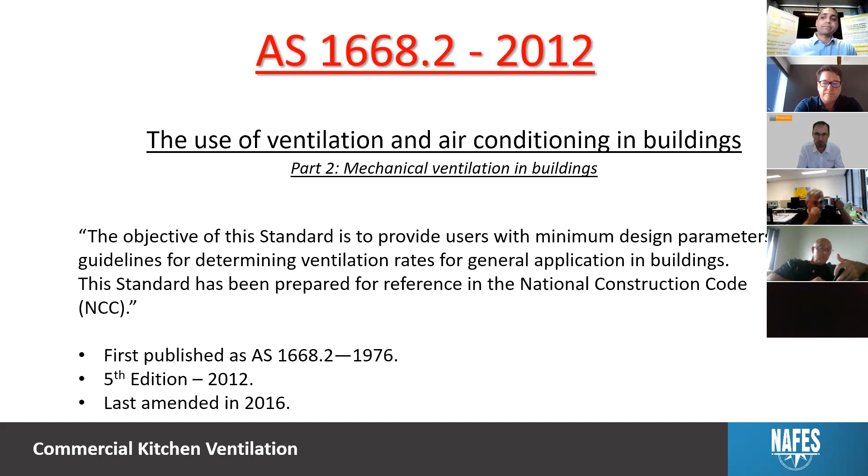Okay. Just a quick summary of today's topics. The standard, as I said, is quite vast, and even the kitchen ventilation segment is quite vast as well. So we've picked a couple of key topics that, by popular demand, we thought would be quite useful to everyone. The first topic is minimum equipment overhangs for typical appliances. We'll discuss that with the different types of appliances and the overhangs from the sides and the front. We're also going to talk about kitchen exhaust hood filters. We'll identify some common filter types and then the distances required from specific appliances.

Another topic is kitchen renovations and the rules around renovating your kitchen with regards to the ventilation system. Another popular one was solid fuel appliances. As we know, they're all the rage these days. There's a solid fuel kitchen appliance going into almost every kitchen. So we'll discuss what the Australian standard states about that. To keep things brief, we will be focusing on what the standard says as opposed to anything external, but I will mention certain possibilities around that to help get a project on the go.

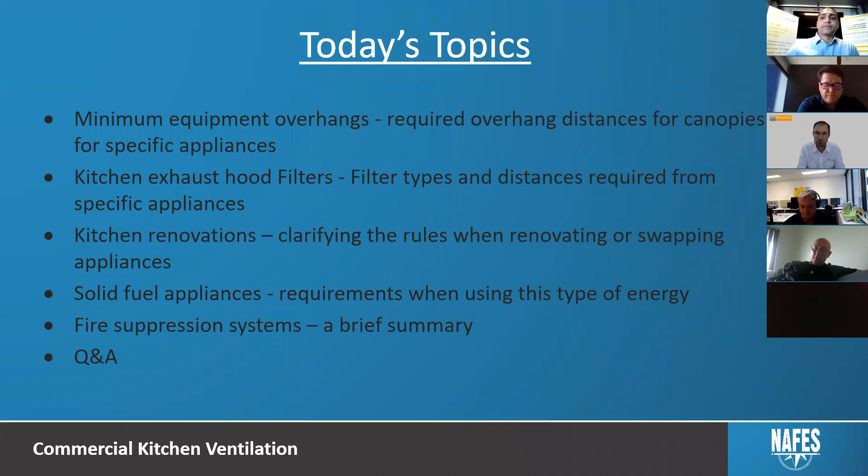Okay. So the first topic, minimum overhangs. So I hope you can all see this.

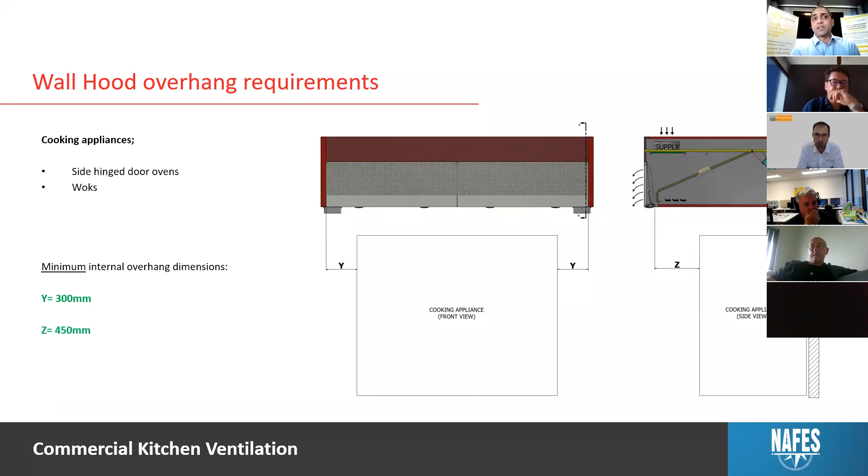And looking at a different set of appliances, so side hinged door ovens, so combi ovens, convection ovens that are hinged on the side. And this also includes Asian cooking tables such as woks. They require a 300 mil side overhang, so that's on the left and the right hand side. You need 300 mil to the inside of the hood. And then you require 450 mil from the front of that appliance. So say it was a wok, from the front of that appliance to the inside edge of the front of the hood. That's 450 mil. Okay.

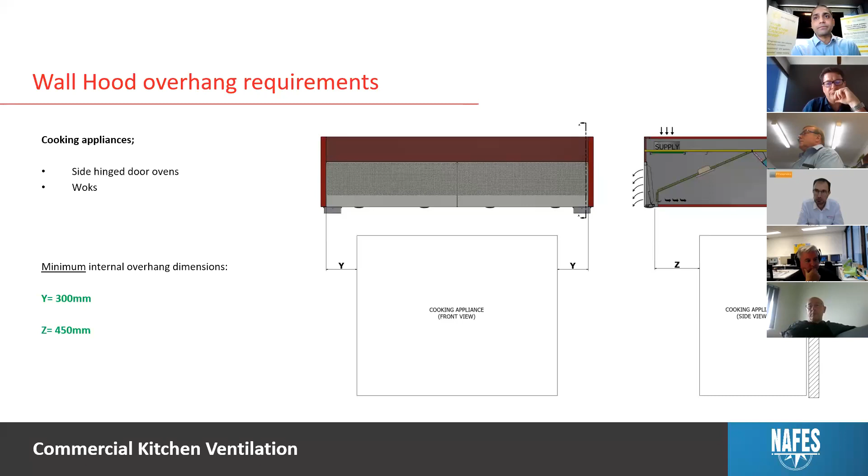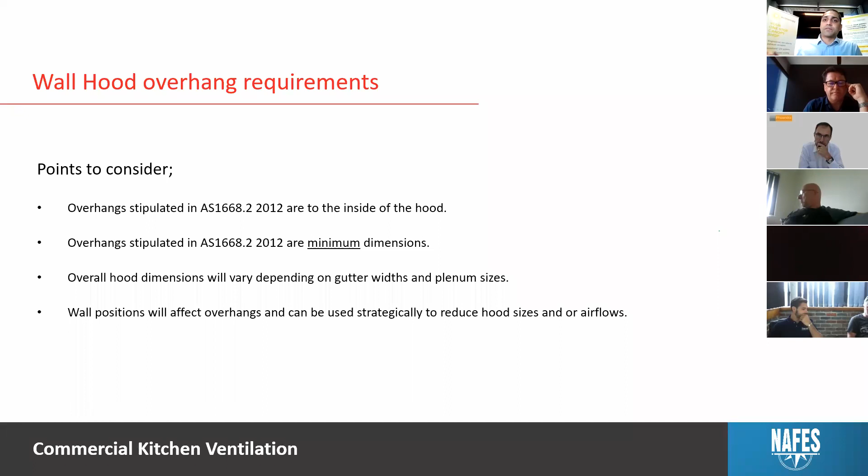So you need to keep in mind that the external dimensions of the hood might be larger than what the internal overhang requirement is because of the size of that gutter or the size of that plenum in front of the hood. I'll just go back to one of these images quickly just to explain it a little bit better. So as you can see in this frontal overhang here, this hood has a supply air plenum. Therefore, that front portion of the hood is quite wide. So even though the overhang requirement for the appliance is 300 mil, once you add the front plenum, which could be another 100 mil or 150 mil, that's what entails your total external dimensions.

Okay. Akram, I might just pause you for a sec there if I can. So there's a few questions on those overhangs already, so I might just cover those off while we're in that area. It might be useful to you refer to the drawings again.

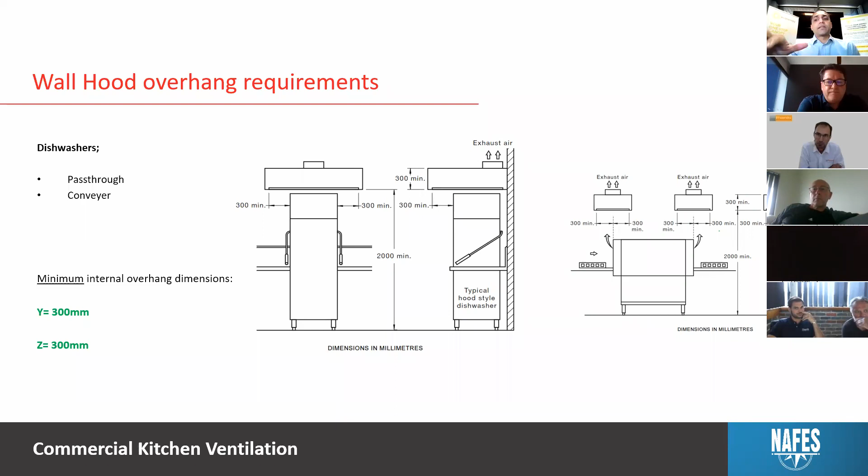So Adrian has asked, can you discuss whether an item, e.g. salamander or overshelves, can be placed above cooking bank items under the canopy? I have never been able to find out where it states this cannot happen. Okay, so the Australian standard itself does not state that it can't be done, but in practice, what happens is quite often that it interferes with the smoke plume rising up to the filters, and it could also be considered a fire hazard if it is not maintained, because obviously grease can build up under the salamander or on the shelf of the salamander, which in the event of a flare-up could pose a significant risk.

But the Australian standard itself doesn't state that it can't be done. There might be other standards that could mention that it could be an OH&S issue. Might be worth bringing Rob in here if he's got any additional information or advice on that from a mechanical engineering perspective. Hopefully he's there. Sorry, I had myself muted. That's okay. So we often have salamanders placed above cooking bank items. I think Akram's comment, though, about fire safety is the only element that gives us pause for concern. So I don't think there is anywhere that says that it cannot happen.

The Australian standard for ventilation, AS 1668, is one of these standards that's built to last, but it's also very draconian. So the way that they apply their calculations is that they assume in any one footprint there's only one piece of equipment. So this is one of the great challenges with this particular standard. Akram's company and other companies can sidestep this issue by using what is permitted in AS 1668, which is a calculation procedure called VDI 2052. I don't really want to side rail this conversation, but the VDI 2052 gives you an avenue for calculating the airflows, and that's what they're really nervous about, is the airflows with the salamander in.

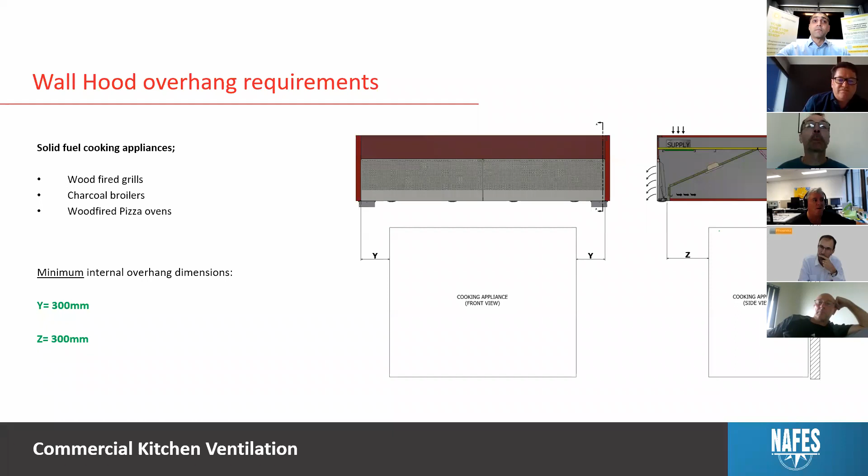Thanks, Enzo, for that clarification too. That's useful. I'll move on to the next question, which is a simpler one, which is what about broilers, gas broilers? I think he's referring to specific overhangs, if there are any, relating to gas broilers. Akram, do you want to chip in? Yep. So with gas broilers, the ones typically like